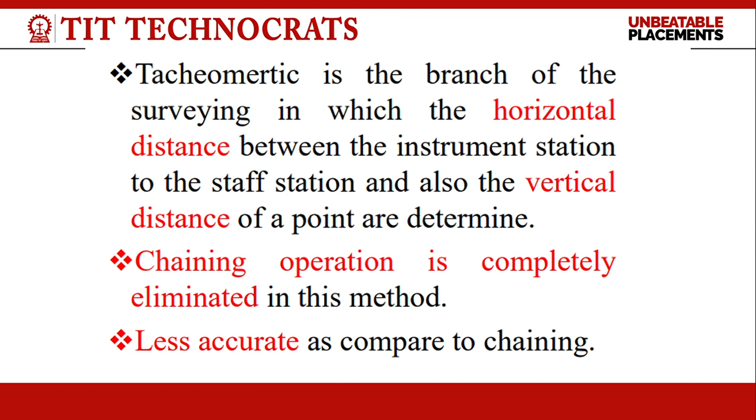Tachometric surveying: Tachometry is the branch of surveying in which the horizontal distance between the instrument station to the staff station, and also the vertical distance of a point, are determined. Here, the chaining operation is completely eliminated.

Tachometry is used when there is a steep ground, broken ground, or stretches of water. In rough country, both horizontal and vertical measurements are tedious and chaining is inaccurate, so tachometric survey is preferred. This method is also used to find out the contours.

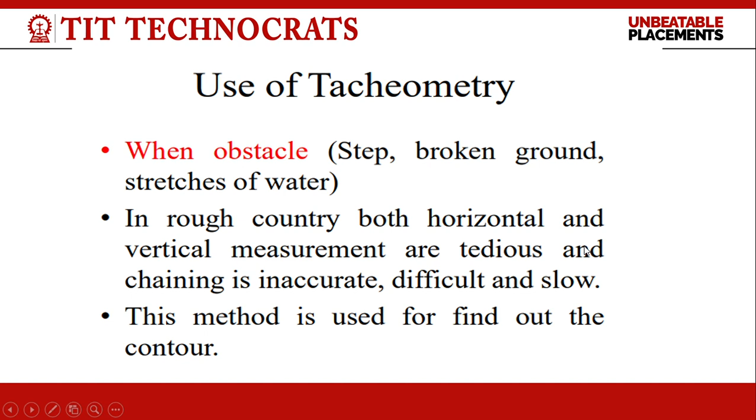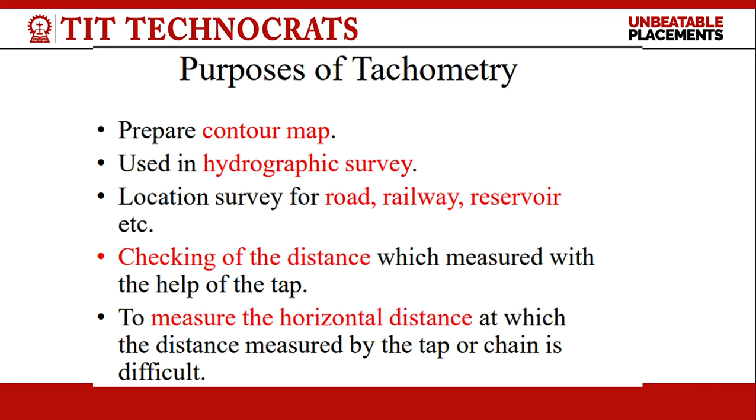The purposes of tachometry are to prepare contour maps used in hydrographic survey, location survey for road, railway, reservoir, checking of distances measured with the help of a tape, and to measure the horizontal distance where distance measurement by tape or chain is difficult.

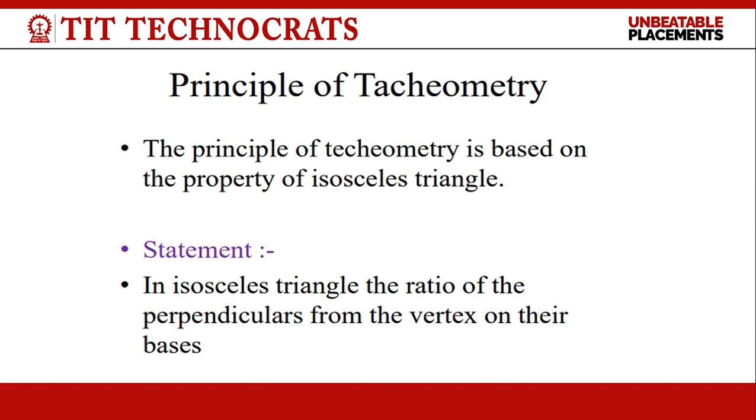The principle of tachometry is based on the property of an isosceles triangle. In an isosceles triangle, the ratio of the perpendicular from the vertex to the base is constant. Here PQR, PQ'R' and PQ''R'' are isosceles triangles whose bases are QR, Q'R' and Q''R''. At point P, PO, PO' and PO'' are perpendiculars to their respective bases. So this ratio is constant, and this ratio is known as constant K.

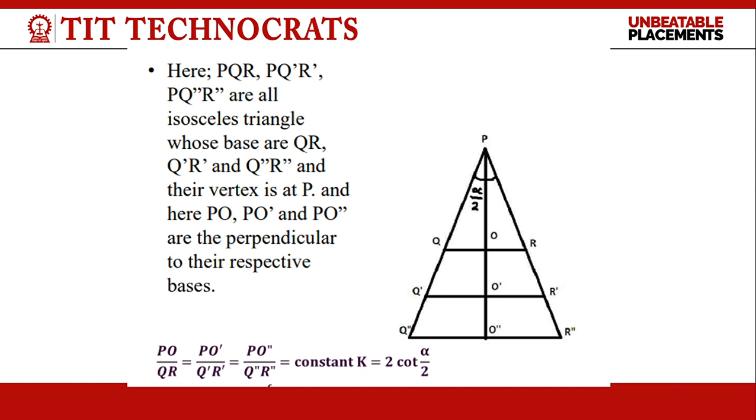In tachometric survey, two instruments are used: one is the tachometer and another is the leveling staff. The tachometer is usually a transit theodolite having a stadia diaphragm. This diaphragm is equipped with two horizontal hairs called stadia hairs, in addition to the regular cross hairs. The additional hairs are equidistant from the central hair, and the diaphragm is commonly used in second slide.

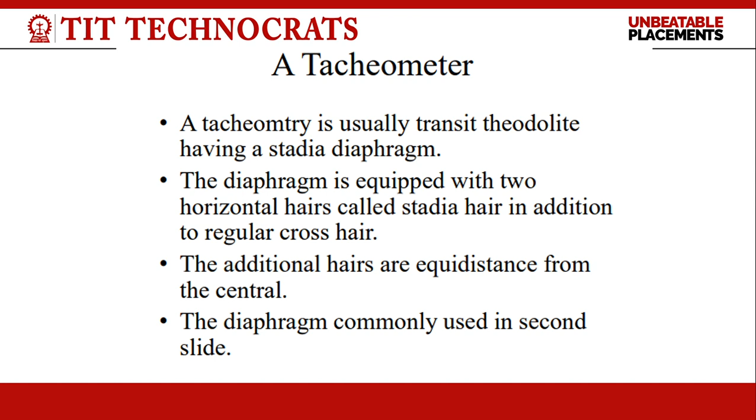These are the types of stadia hairs. In type A, there is a central hair and two equidistant hairs. Other arrangements B, C, D, E or F can also be used as stadia diaphragms.

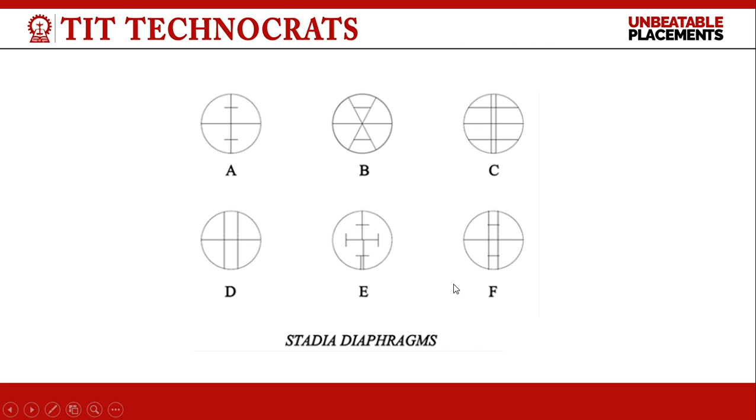The second instrument is the leveling staff or stadia rod. The stadia rod or staff used with tachometry may be the usual type of leveling staff having a least count of 0.005 meter. The stadia rod is usually in one piece, but for easy transport it may be folding. The width of the staff is 5 cm to 15 cm and the height is 3 to 5 meters. Generally a 4 meter leveling staff is used. It is graduated in meters or centimeters, and the graduations must be simple and clear.

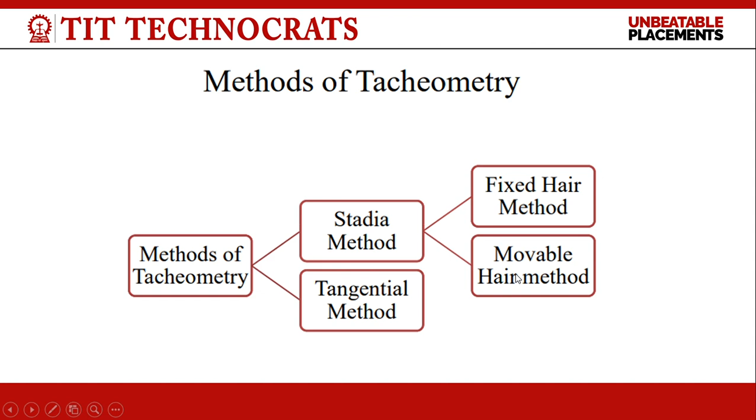The method of tacheometry can be the stadia method or the tangential method. The stadia method can be of two types: one is the fixed hair method, and the other is the movable hair method.

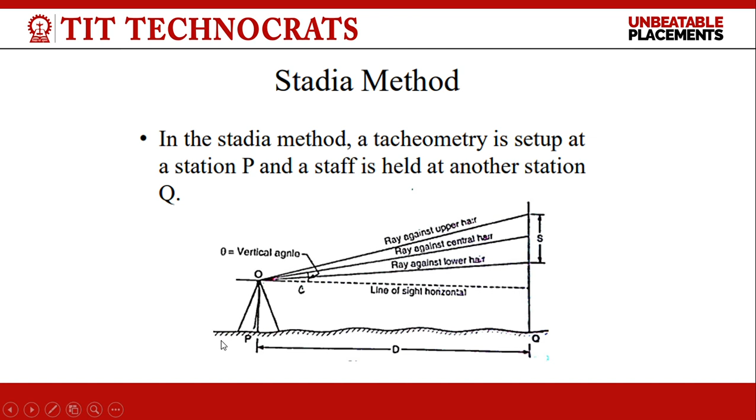Stadia method: here the tacheometer is set up at station P and the staff is held at another station Q. This is the ray against the upper hair, this is the ray against the central hair, and this is the ray against the lower hair. The height between the upper and lower hair ray is known as S. Here the vertical angle is measured and the staff intercept is measured, and the horizontal distance D is determined with the help of a formula.

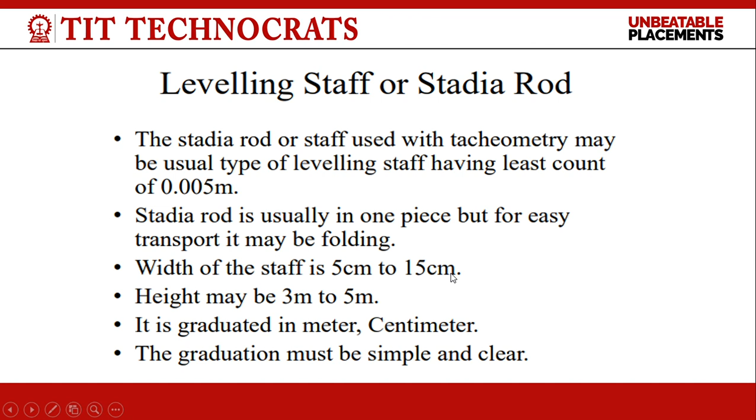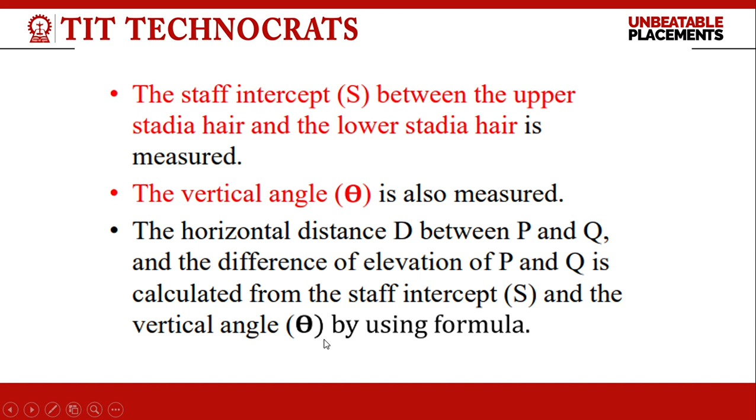The leveling staff or stadia rod used with tacheometry may be the usual type of leveling staff having a least count of 0.005 meter, usually in one piece. The staff intercept S between the upper stadia hair and lower stadia hair is measured, and the vertical angle is also measured. The horizontal distance D between P and Q, and the difference of elevation of P and Q, is calculated from the staff intercept and vertical angle theta using the formula.

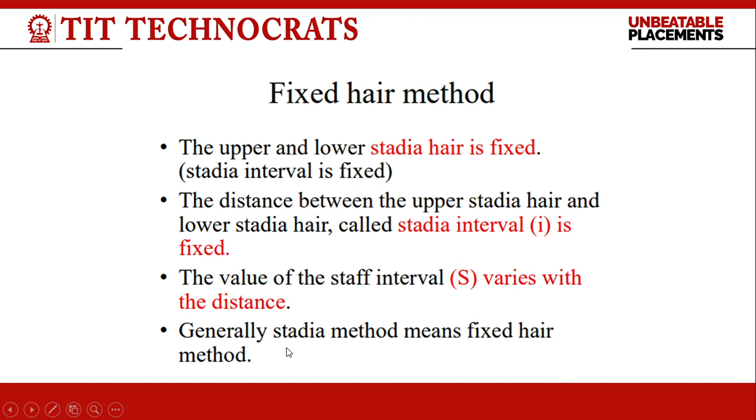Fixed hair method: the upper and lower stadia hairs are fixed. The distance between the upper stadia hair and lower stadia hair, called the stadia interval, is fixed. The value of the staff intercept S varies with the distance, and generally the stadia method means the fixed hair method.

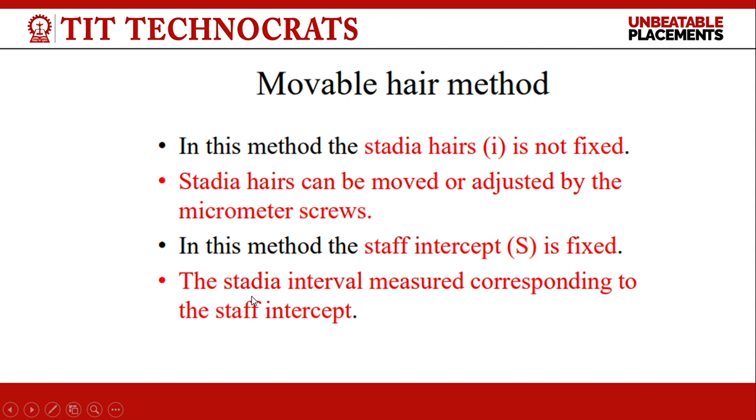Movable hair method means the stadia hair is not fixed; it can be moved or adjusted by micrometer screws, and in this method the staff intercept is fixed. The stadia interval is measured corresponding to the staff intercept.

There are some differences between the fixed hair method and the movable hair method. In the fixed hair method, the stadia interval is fixed, while in the movable hair method the stadia interval is not fixed. In the fixed hair method the staff intercept is not fixed, while in the movable hair method the staff intercept is fixed. The fixed hair method is most commonly used to take readings speedily, but the movable hair method is not generally used because it is inconvenient to measure the stadia interval accurately.

Here the tacheometer and staff are used; theodolite and staffs are used for this purpose.

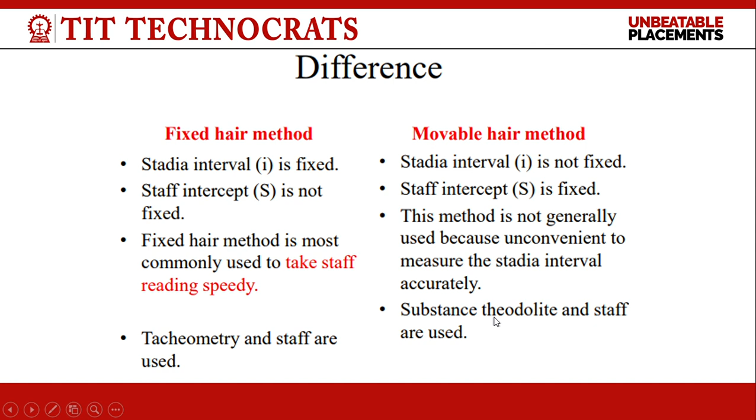Tangential method is the third method. In this method, the diaphragm of the tacheometer is not provided with stadia hairs. Readings are taken by the central horizontal hair. A staff with two targets at a fixed distance is used for taking readings. The vertical angles theta 1 and theta 2 are measured, and the vertical angles along with the fixed distance are used to determine the horizontal distance d.

There are some differences between the stadia hair method and the tangential method. In the stadia hair method, the diaphragm of the tacheometer is provided with three stadia hairs; here, the diaphragm is not provided with stadia hairs. Looking through the telescope, the three stadia readings are taken in the stadia hair method, whereas here the readings are taken by a single horizontal hair adjusted to the upper and lower target respectively. In the stadia hair method, one vertical angle is observed, while here two vertical angles are observed. The stadia hair method is the most commonly used in practice, while this tangential method is not commonly used in practice.

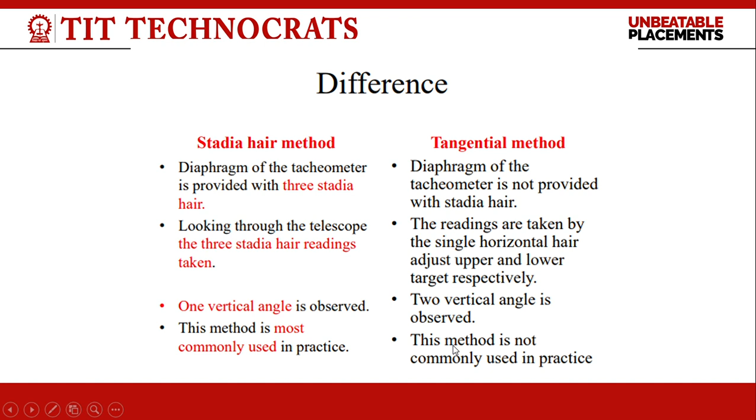In the fixed hair method, there are three cases. First, when the line of sight is horizontal and the staff is held vertical. Second, when the line of sight is inclined and the staff is held vertical. In this case, we can measure either the angle of elevation, which will be plus theta, or the angle of depression, which will be minus theta.

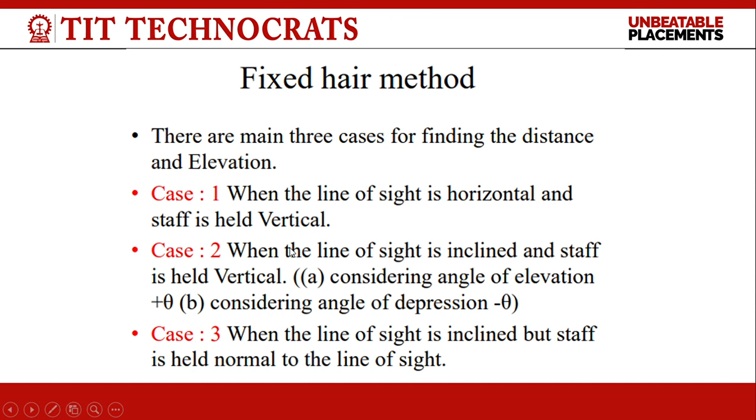When the line of sight is horizontal and the staff is held vertical, this is the most common case. So here we can derive the horizontal distance formula.

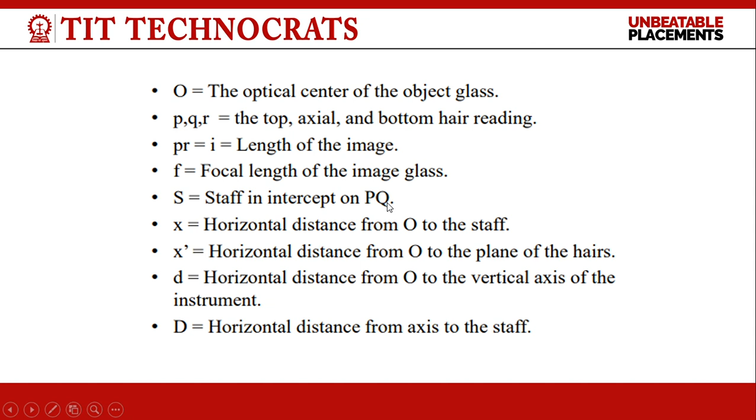These are some properties of this lens system. By using this type of derivation, we can determine the distance d is equal to f upon i into s, plus f plus d. This ratio, f upon i, is known as k, which is known as the multiplying constant, and f plus d is known as the additive constant. So d is equal to ks plus c. This is the formula for tacheometric survey.

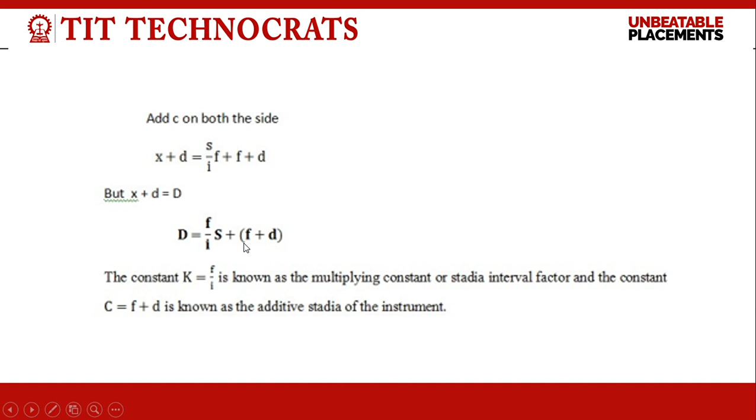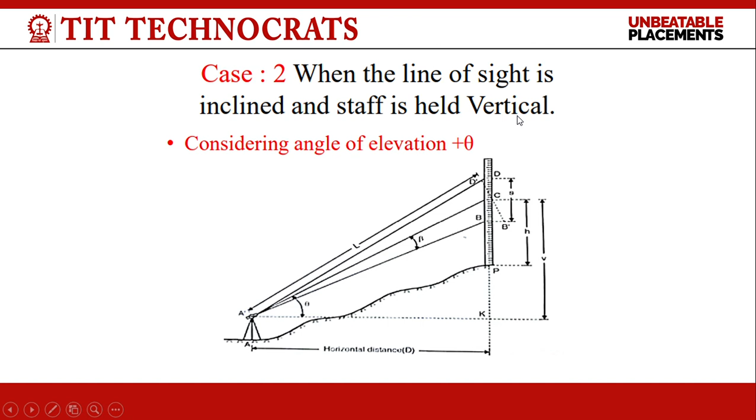The vertical distance when the line of sight is horizontal will be zero. For the second case, when the line of sight is inclined and the staff is held vertical, by using this type of measurement we can derive the vertical distance formula, that is v is equal to L sin theta, that is ks sin theta plus c sin theta.

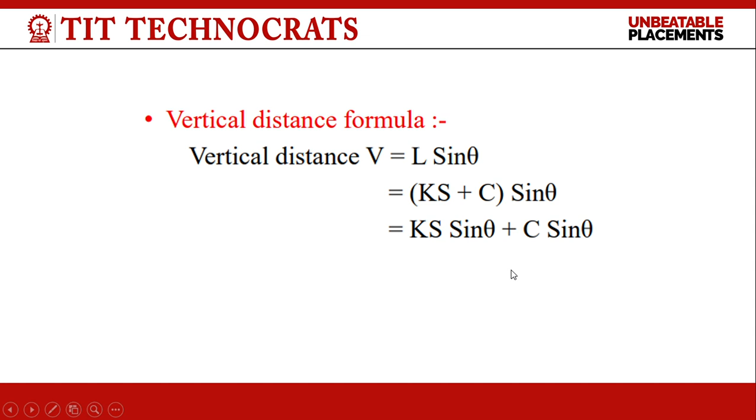Now let us solve some numericals based on tacheometric survey. We will use the horizontal distance formula, d is equal to ks plus c, where d is the horizontal distance, s is the staff intercept, k is the multiplying constant, and c is the additive constant, already derived in the previous slides.

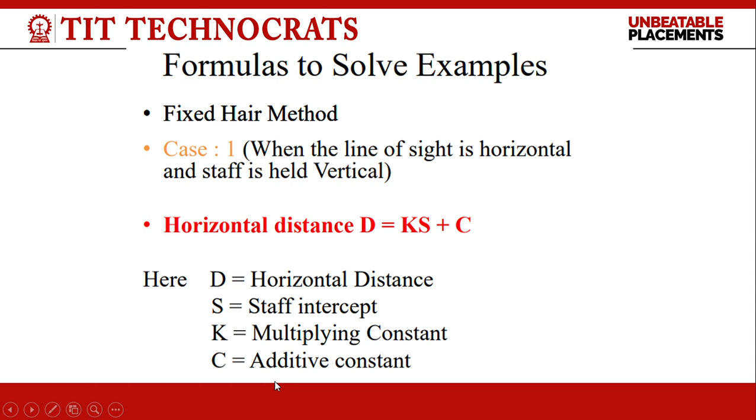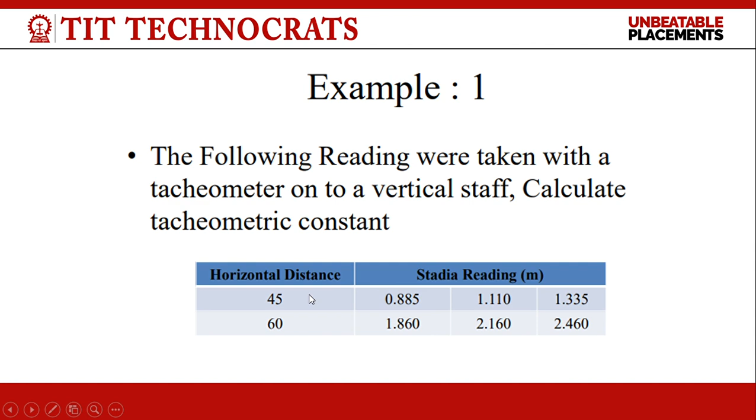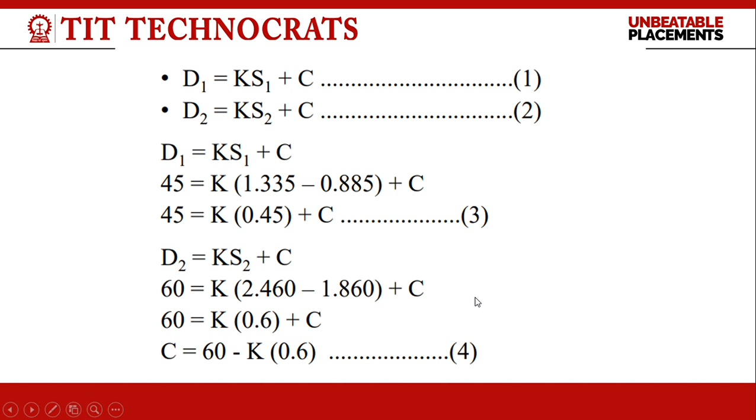By using these two sets of readings, we can determine the constants K and C. So D1 is equal to Ks1 plus C, and D2 is equal to Ks2 plus C. By applying these equations and putting the values of S1, D1, S2 and D2, we find K is equal to 100 and C is equal to 0.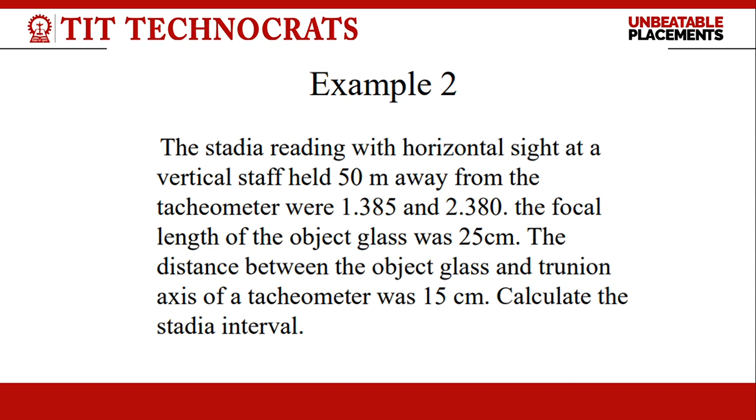This is the second example. The stadia readings with horizontal sight at the vertical staff, 50 meters away from the tacheometer, are 1.385 and 2.380. The focal length of the object glass is 25 cm, and the distance between the object glass and the trunnion axis of the tacheometer was 15 cm. Calculate the stadia interval.

So d is equal to ks plus c, and d is equal to f upon i into s, plus f plus d, where d is given as 50 meters, s is equal to 2.380 minus 1.385, that is 0.995, f is equal to 25 centimeters, which we convert to 0.25 meter, and d is 15 centimeters, that is 0.15 meter.

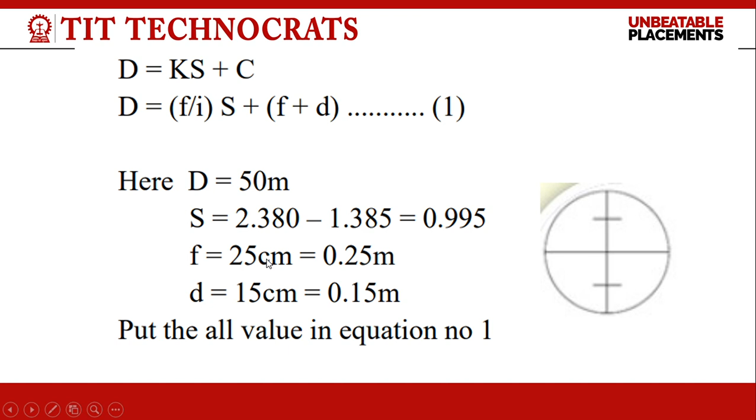We put all these values into the equation: 50 is equal to 0.25 times this expression. By using this, we can determine the stadia interval as 5 mm. Thanks.